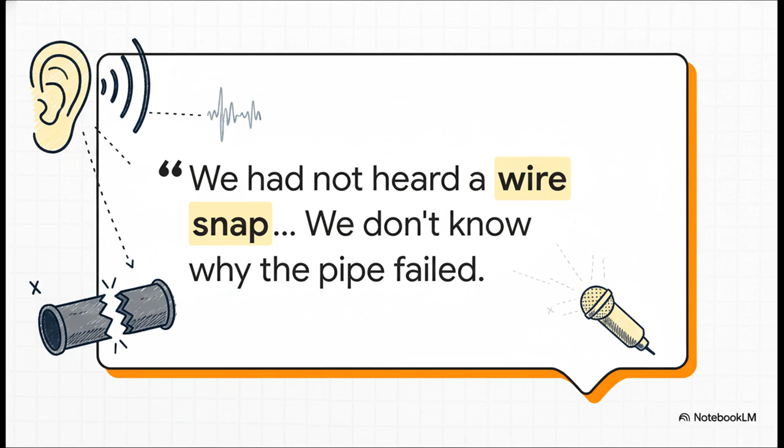And right here, this is the heart of the mystery. You see, the city was using this really advanced acoustic monitoring system. It's literally designed to listen for the tiny, telltale pings of a pipe that's about to break. But in the months leading up to that second massive failure, the system heard nothing. Not a peep. The pipe just gave way. How on earth does that happen? Well, that's what we're here to figure out.

Okay, so let's set the scene. We're going to rewind the clock to June 5th, 2024. This was the day the crisis kicked off, and a city of over 1 million people had to learn very quickly just how fragile their world really was. This was a sudden, explosive failure. A local state of emergency was declared almost immediately. The city went into full-on conservation mode with stage 4 restrictions. That meant no outdoor watering, taking shorter showers, every single drop counted.

And when the crews finally managed to excavate this enormous pipe, they found the culprit. About 200 of the high-strength steel wires that are supposed to hold it all together had just snapped. It was like the pipe's entire skeleton had shattered from the inside out.

So what exactly is this pipe that caused so much trouble? To really understand why it failed, you gotta understand the technology itself. And back when it was installed in 1975, this thing was considered an absolute marvel of engineering. It's called pre-stressed concrete cylinder pipe, or just PCCP. And you can really think of it as a city's main concrete artery. The whole design is pretty ingenious. It combines the different strengths of concrete and steel to create this super strong pipe that was expected to last for 100 years. But, spoiler alert, this one barely made it to 50.

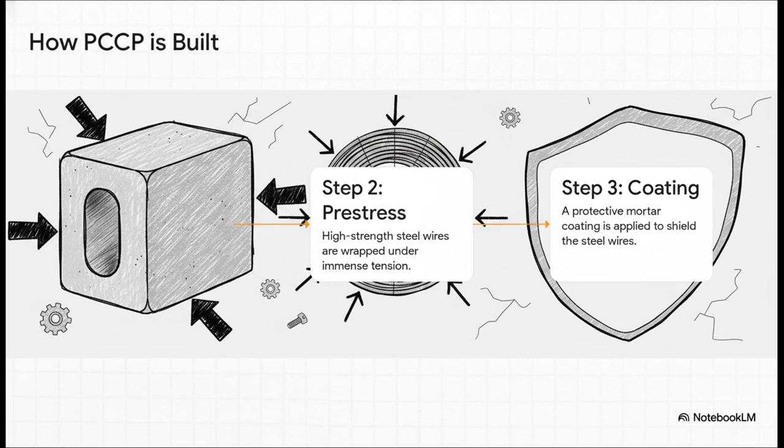Now, the way this pipe is built is the key to this whole story. You start with a concrete core, right? And concrete is great at resisting being squeezed. Then, it's wrapped with these incredibly tight steel wires, which are perfect for handling the outward pressure of all that water. And then, this is the crucial part, it's all covered in a protective layer of mortar. That mortar has one job and one job only, to shield those vital steel wires from the outside world. Remember that part. It's going to be important.

All right, let's dive into the forensics. We've seen the what happened. Now let's get into the why. This is where all the evidence starts to tell a really fascinating story about a hidden flaw, a chemical culprit, and a slow-motion collapse that was decades in the making.

So again, PCCP is this brilliant partnership. You've got concrete handling the compressive force, and then you have those tension steel wires handling the force of all that water pushing outwards. The entire system, the whole design, relies on those wires keeping their strength and their tension. If they go, the whole thing goes.

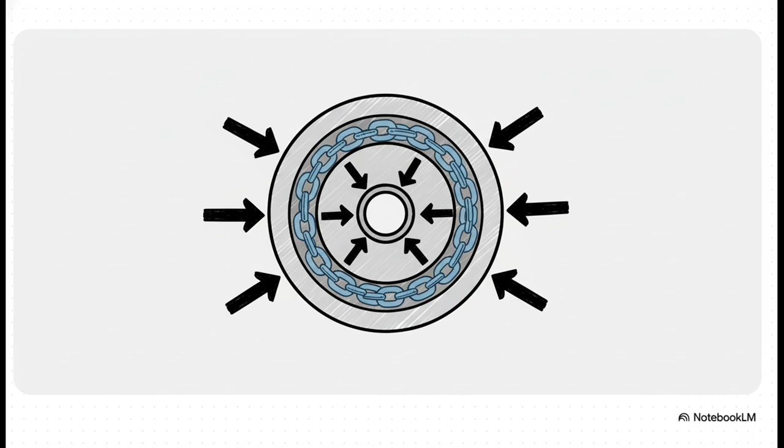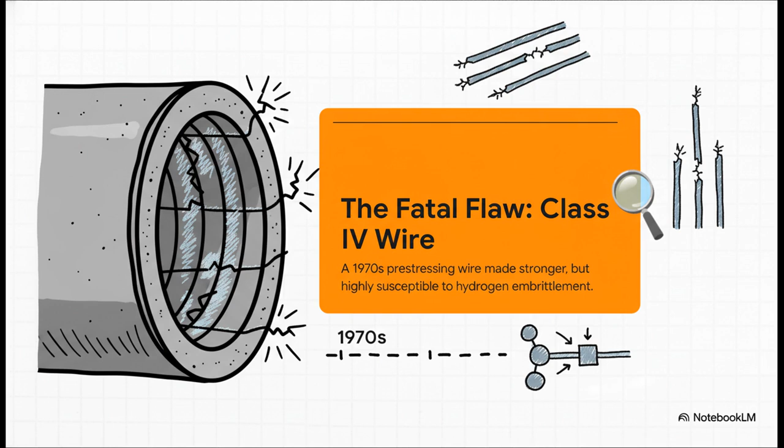And here it is, our first major clue in the investigation, what you might call the pipe's hidden birth defect. The specific type of steel wire they used back in the 70s, known as Class 4 wire, was made using a process that made it stronger, sure, but it also left it incredibly vulnerable to a very specific, microscopic kind of attack. And that attack has a name: hydrogen embrittlement.

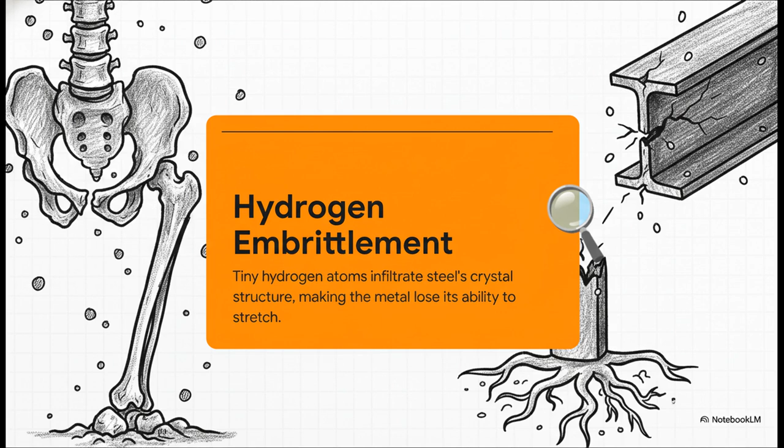Honestly, the easiest way to think about it is like osteoporosis for steel. These tiny little hydrogen atoms from the soil sneak their way into the steel itself, and they make it incredibly brittle. The steel basically loses its ability to stretch or bend, and instead it just snaps. Like glass. This 3-step process is what makes it so dangerous.

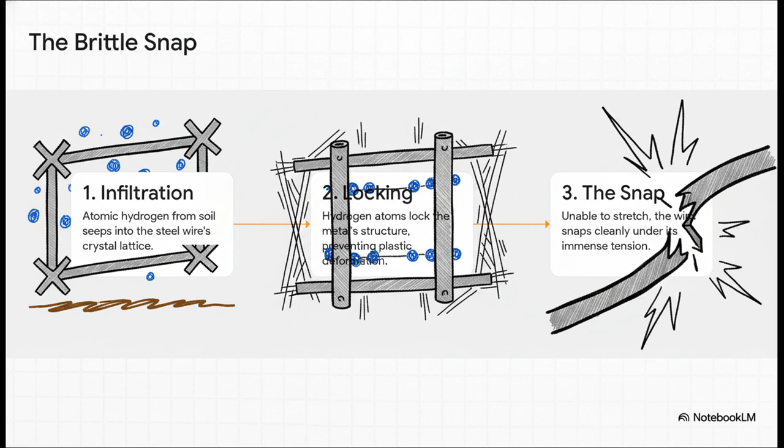First, the hydrogen atoms get in. Second, they lock the steel's internal structure in place. And then, under the immense tension it's always under, the wire simply can't flex anymore. It just snaps, cleanly. No warning signs, no stretching, just a sudden, catastrophic break.

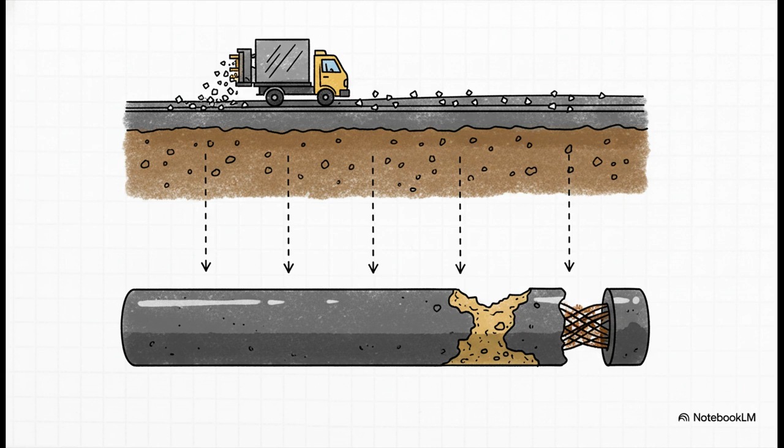So that leads to the next big question, right? This pipe had this vulnerability its entire life. Why did it suddenly start failing after 5 decades of just quietly doing its job? What was the trigger? And the answer, believe it or not, is something you would never suspect: road salt.

For decades, the city had been salting the major roads that ran right over this pipe. That salt slowly seeped down into the soil, creating this corrosive brine that, over time, just ate away at that protective mortar coating we talked about. And once that shield was gone, the vulnerable steel wires were finally exposed to the hydrogen in the ground.

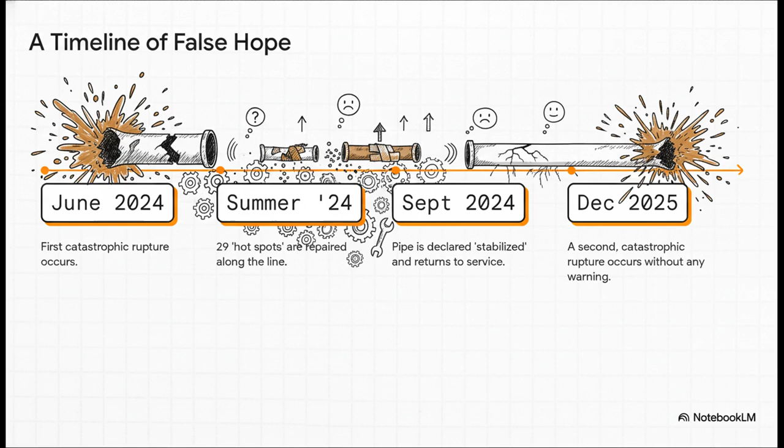After that first break, the city finds and repairs 29 other damaged sections. In September of 2024, they declare the main stabilized, and they put it back into service. And for over a year, everything was fine. Until December 30th, 2025, when it all happened again.

And this brings us right back to that central mystery, the silent failure. Remember that acoustic fiber optic system? It was designed to hear the ping of a wire snapping. The whole theory is that you can count these snaps and predict when a collapse is coming. But what happens if the pipe starts to fail in a different way?

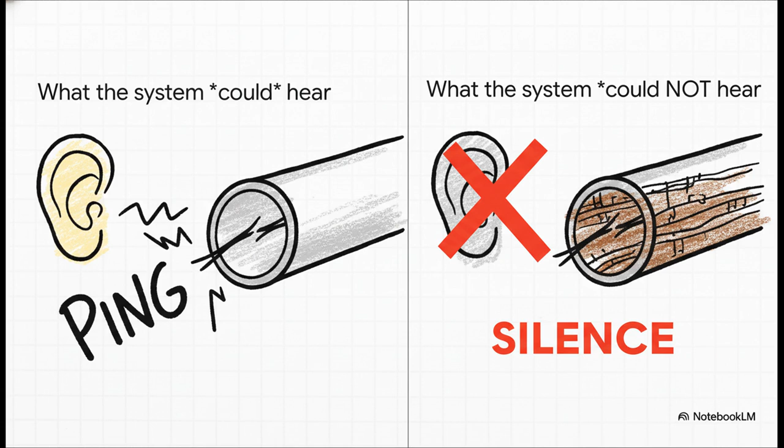What if the wires aren't just snapping, but are slowly being thinned out by widespread corrosion? Well, that process is silent. The monitoring system was listening for the wrong kind of problem. It was completely blind, or I guess deaf, to the real danger.

So now let's zoom out for a minute, because it turns out Calgary's nightmare isn't some isolated incident. It's actually just one chapter in a much, much bigger story of aging infrastructure all across North America. This specific type of pipe, PCCP from that era, is basically a serial offender. Just look at San Diego. They had so many failures, they ended up relining over 80 miles of it.

The big utility in Maryland, WSSC, has also documented these exact same kinds of silent failures that their acoustic systems completely miss. Detroit's had its own major breaks caused by different environmental issues. You look at this, and the pattern is just undeniable.

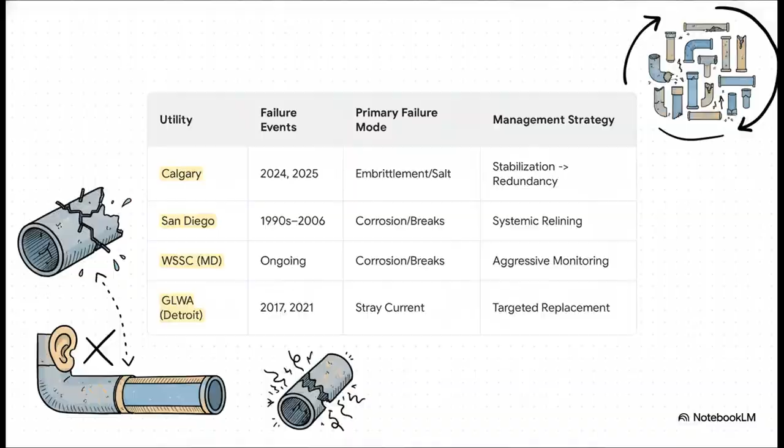So after all this, what's the final verdict in our investigation? And maybe more importantly, what does this whole catastrophe mean for the future of Calgary? And really, for cities just like it everywhere?

Well, first, let's talk about the cost. Just patching up the problems from these two breaks has cost well over $60 million. And that's not a long-term solution. That's just the reactive repair work. It is an incredibly expensive Band-Aid on a problem that is not going away.

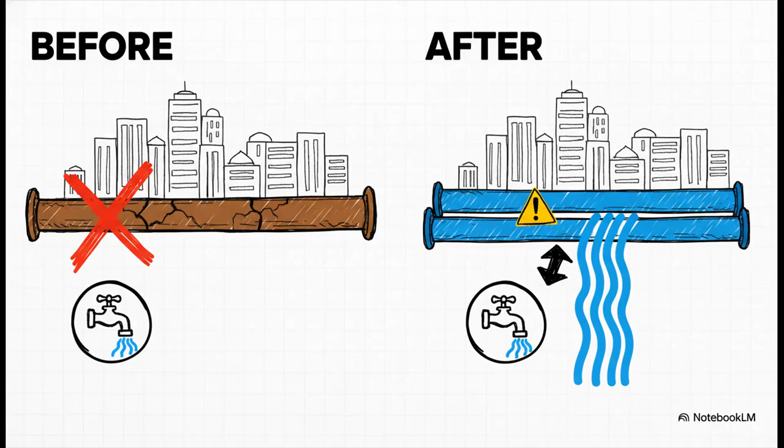And that realization leads to the only real solution: redundancy. Calgary is now in the process of building a completely separate parallel water main. The goal is simple: eliminate single points of failure. Make sure that if one pipe ever fails again, there's another one right there ready to take its place. It's a huge shift from just monitoring a fragile asset to building a truly resilient system.

And that leaves us with this one last thought. The story of Calgary's water main is a huge warning sign. It's a reminder of this vast, complex, and aging world of infrastructure that's hidden just a few feet beneath our feet. And it really makes you wonder, doesn't it? Is your city's infrastructure also living on borrowed time?